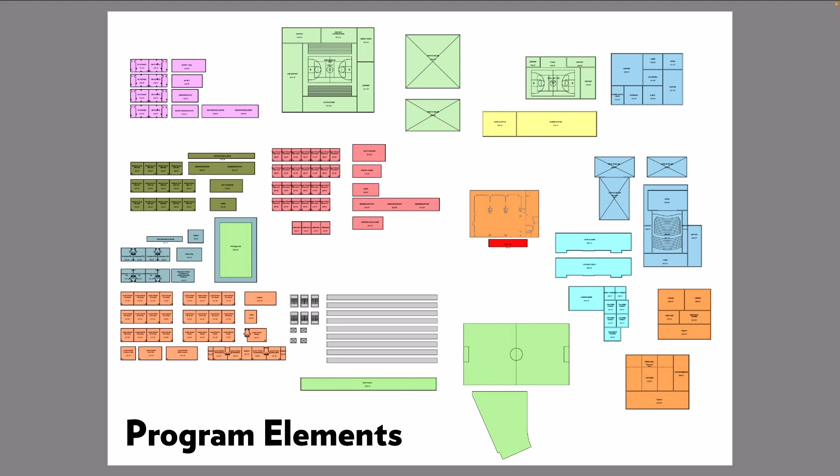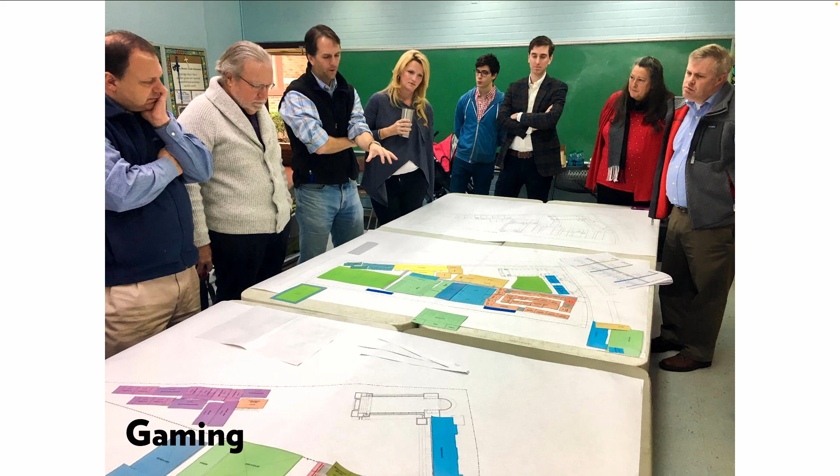Gaming is something we love doing with our clients. It engages our clients fully in the design process. Some of our clients are comfortable drawing an idea for us, but most of our clients are not trained in design and they don't feel comfortable presenting a sketch, a design to us architects. But anybody can engage in gaming.

It's a great way of getting our clients involved in creating building and space adjacencies on the campus, and they loved it. In fact, we had 2 3-hour gaming sessions with the committee, and we came up with the bones of the master plan through that process.

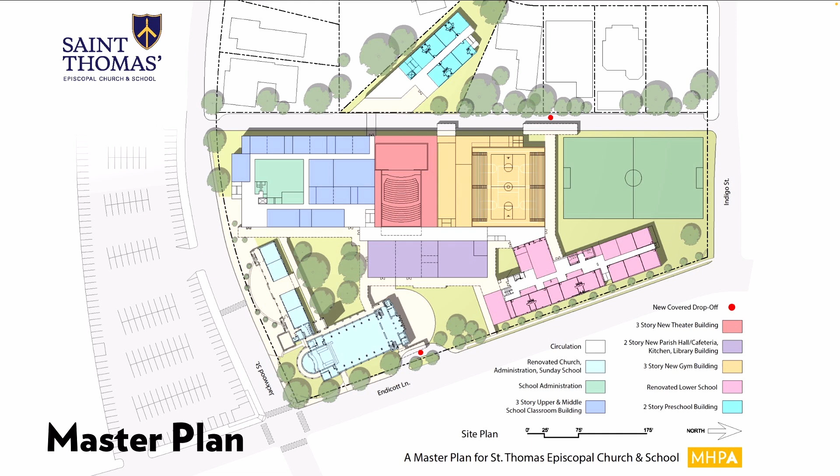We looked at options and settled on this final master plan that you see here. The building at the top, the blue, the red, and the yellow, is one 3-story structure that will be completed over multiple phases of work.

St. Thomas did not own any parking, and they were very nervous about that. The parking lot that you see to the left is owned by the landlord, is owned by Fidelis, a property owner in the area. So they're very eager to find a way, despite having only 5 acres, to add some parking onto their campus. So we devised a way to put 1 floor of parking under this big 3-story structure.

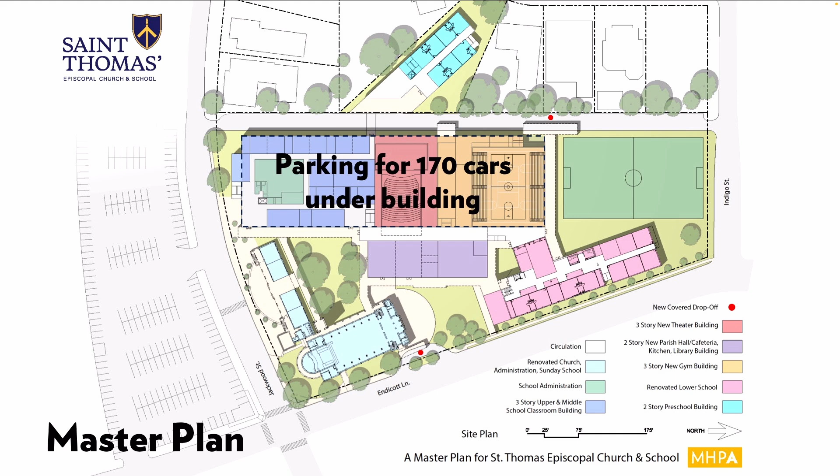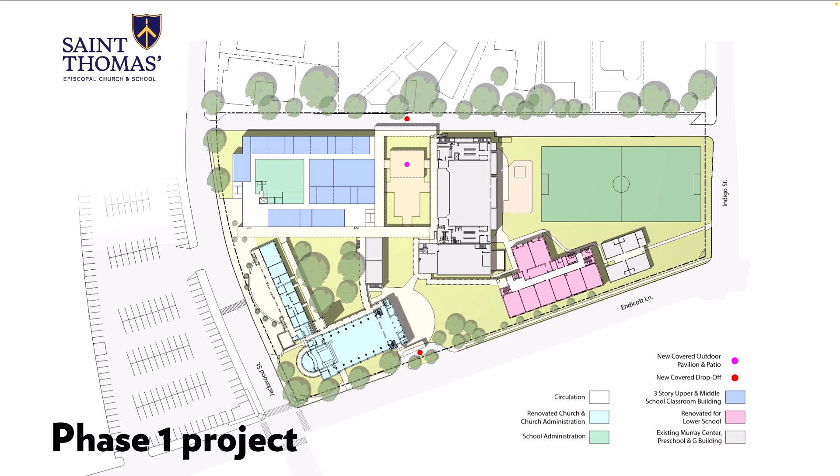Through all of our discussions with the committee, the top priorities bubbled to the top, and they became the phase 1 project in the master plan. It is the first piece of that large 3-story building that I described.

Once the plan settled down, everybody liked how the campus was flowing and functioning. We brought it into 3 dimensions. We developed the architectural character of the campus. St. Thomas looks like a little Rice University, and they love the character of their campus.

And they said, please embrace this style. And we said, yes, we love Rice University too. We love your campus. Let's work within your beautiful style of architecture. So we did that. But on the inside, they wanted things to be a little different. On the inside, they wanted things to be fresher and more modern, and that is what we did, as you will see.

We were very concerned about scale, as always, when it came to this large 3-story building. So we paid very careful attention with floor-to-floor heights, with the materiality of the design, with the detailing of the design, so that it did not overwhelm the smaller, more intimate scale of the remaining buildings.

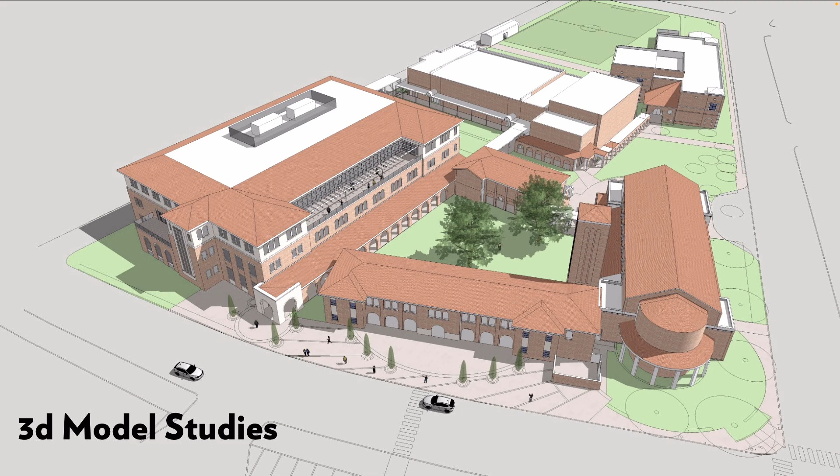Once we completed the 3D design, we worked with an artist to create beautiful artwork to support their fundraising efforts for the project. They had 6 high-quality renderings produced along with an animation.

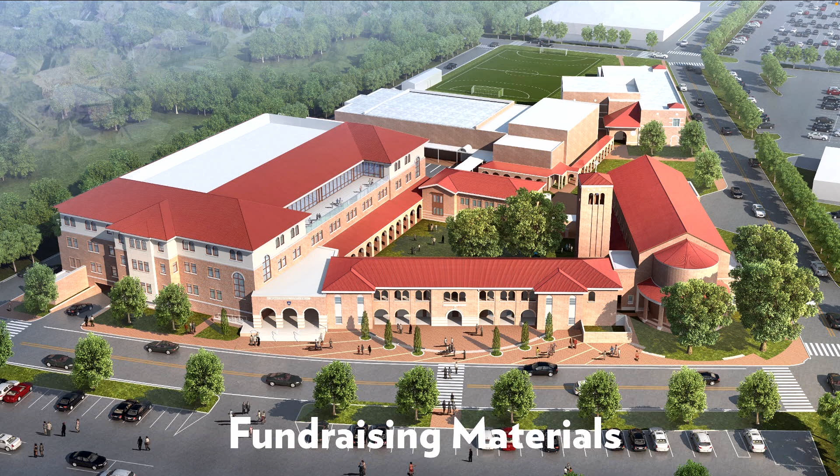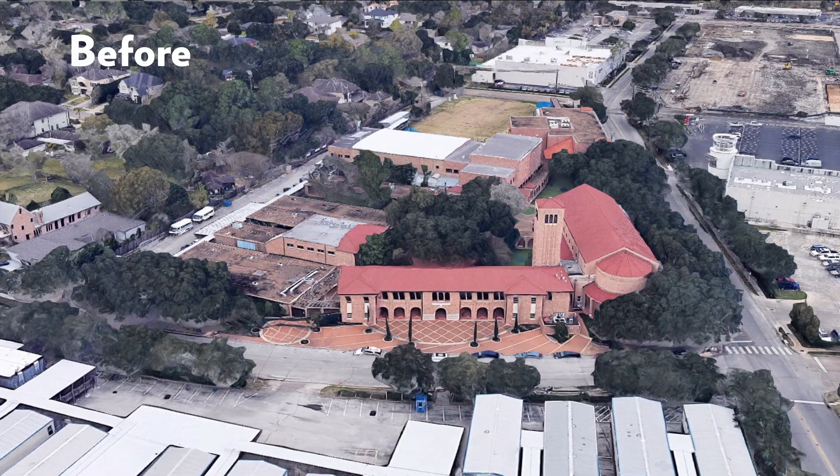I want to show you before and after. This is what the campus looked like before the storm. There are 4 one-story buildings on the left developed in the 1960s. They were past their useful life already, but after the storm they were effectively condemned. Those buildings were ripe for demolition, so we took them down and replaced them with the building you see here.

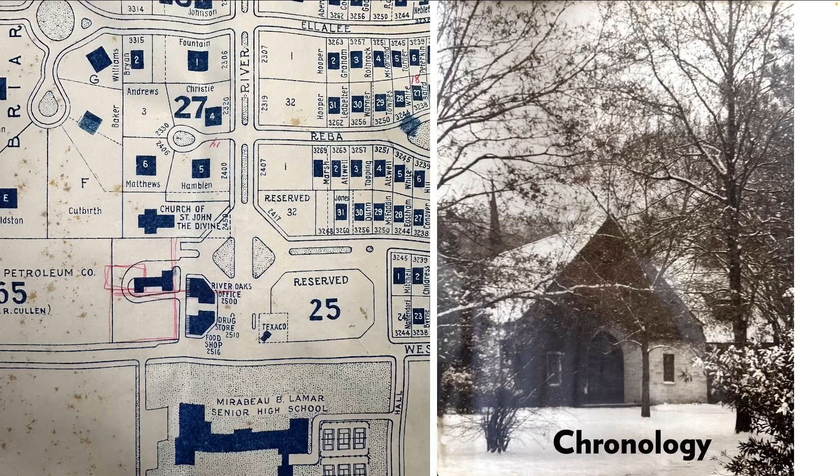This is fun. We were here for an all-day work session last week and found some old drawings, including this 1942 plat of River Oaks. This is a photograph of just a piece of it where the chapel was constructed. Hopefully you can see it there, it's the cross-shaped building in that diagram.

Back then you had only about an acre, maybe a little less, and you didn't own the land to the south where we're standing today. Back then, that's where the River Oaks office was, and there was a drugstore and a grocery store. Boy, has the neighborhood changed. And that's a pretty photograph on the right of the chapel on a rare snowy day in Houston.

Chronology: this diagram shows how the facilities have grown over time, starting with 1940 with the chapel. The church was built in 1953, Sumner's Hall in 1980, and this building was constructed in 1995. When it was constructed, the 1947 parish hall and gym structure was removed to make way for this larger structure. So as Father Lee mentioned earlier, it's been about 30 years since you've done an addition to your campus.

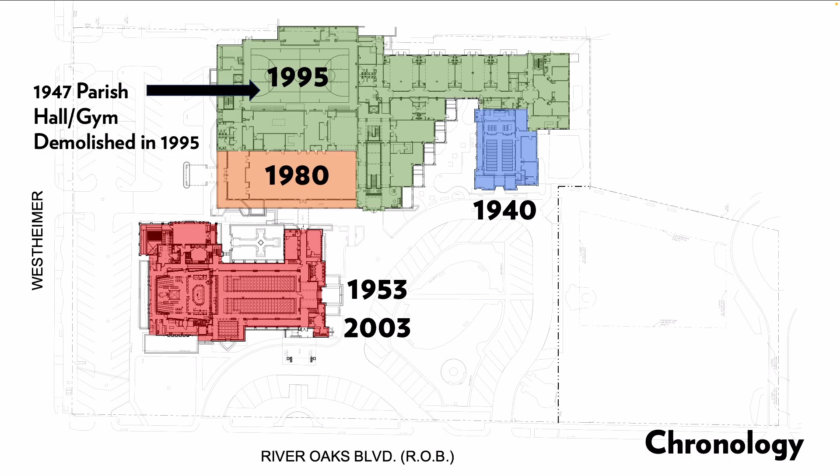This is a recent plat created last year in 2023, and it shows that your main campus, which has 4 acres, is unrestricted in use. There are no deed restrictions, no restrictions of any kind. If you wanted to, not that you ever would, you could build a skyscraper here, but you would, of course, never want to do that. However, the north lawn at the top of the screen is restricted to residential use; it's under River Oaks property owner's jurisdiction.

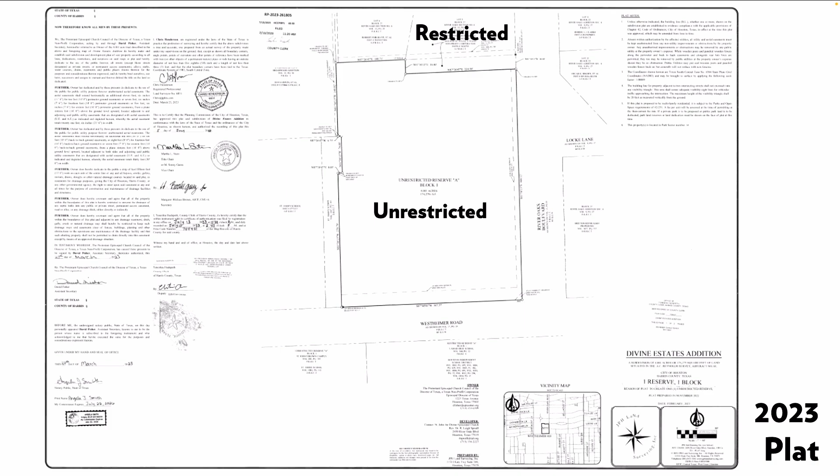Let's talk about image.

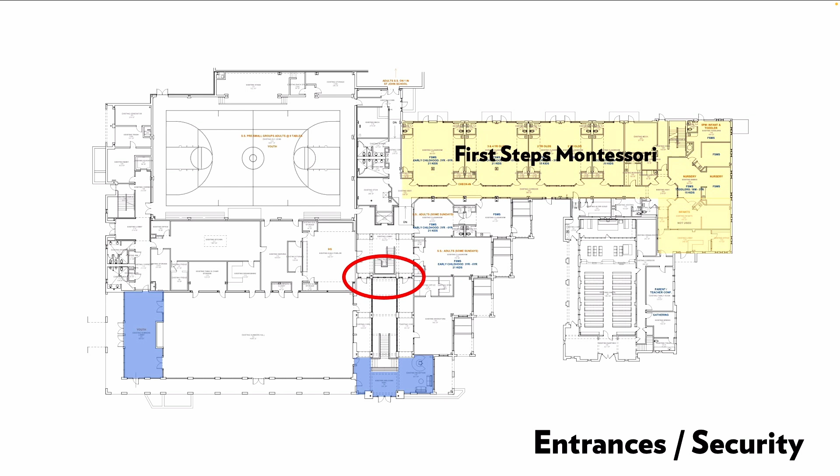Square footage. You have just a hair under 120,000 square feet of air-conditioned space. Just a little less than half of that is on this level, on the first floor of the campus. Everybody wants to be on the ground floor.

You have 31% of your space in the basement, and you have 26,000 square feet, 22% of your space on the second floor. So almost a third of your campus is down in the basement. And in all of the interviews that we have had so far, I think it's fair to say people would prefer not to be in the basement. They would like to be up on the first floor or the second floor to have windows and light and a view.

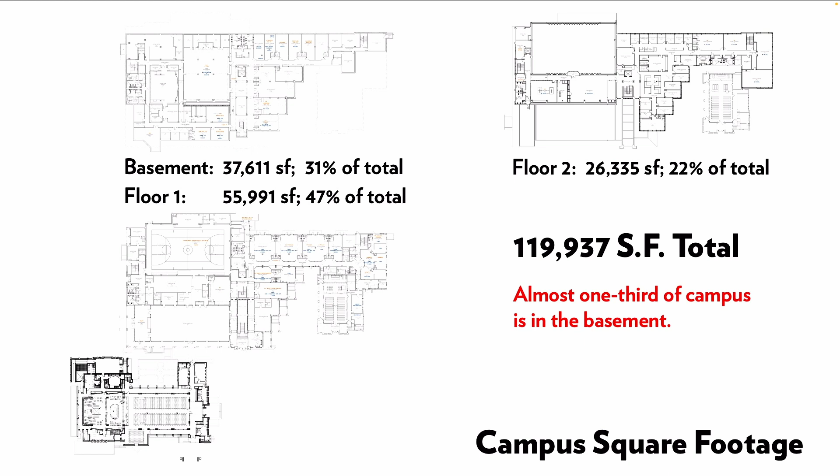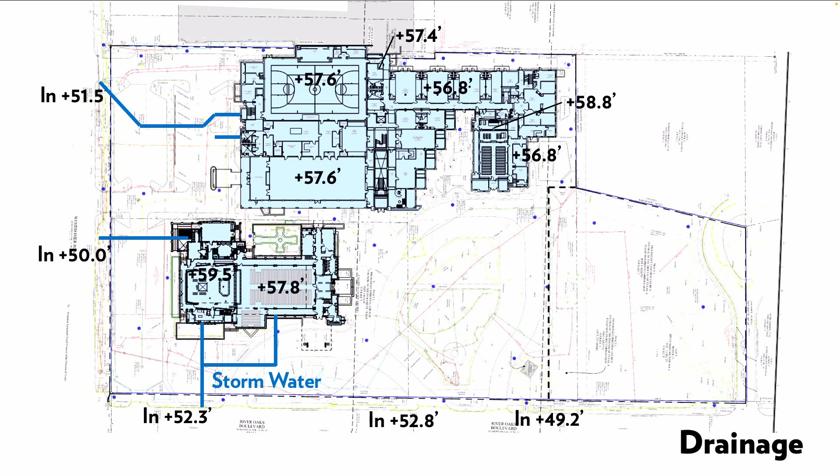Parking. Let's talk about parking.

So you have 113 spaces on your campus today. I don't know of another church your scale that has so few spaces. But you're making it work, you're making a great go of it. But with your desire to grow for the future, I think it's almost a necessity that you find a way, that we find a way together, to add more spaces to the campus.

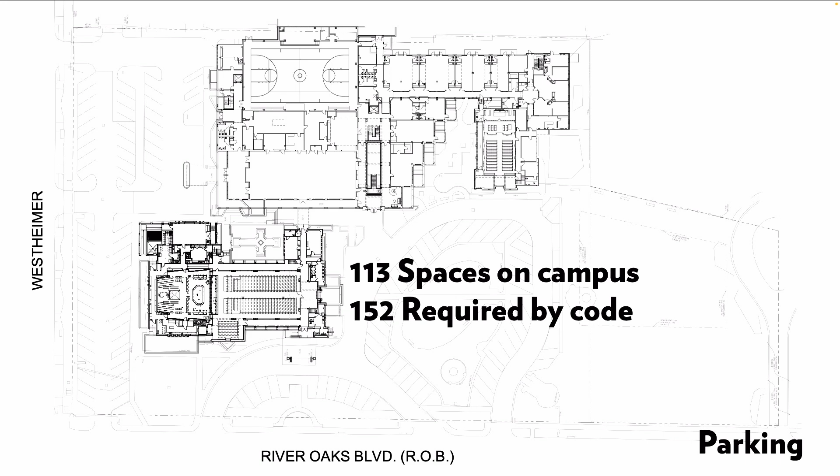I want you to know that if you were to do any project that required a permit from the city of Houston, they would say please prove to us that you have a minimum of the code required 152 spaces. The formula for that is 1 car per 5 seats in the main worship space. So you have a capacity of just over 750 in the church. You do the math, you wind up with 152. So you don't have enough. So when the permit documents are submitted to the city for permitting, it would need to include a notarized shared parking agreement that proves you have at least 152.

The practical need for parking greatly outweighs always the code-required parking. The rule of thumb we use is 2.2 people per car. You all are growing, which is awesome. So far in 2024, you have an ASA, an average Sunday attendance, of 893, not including folks online. Your big parking crunch comes in the morning from 9 to 12, and at that point in time you have to have enough parking to accommodate 658 people on average. 658 divided by 2.2 gives us 299 parking spaces needed.

You have 113 on site. That means most of you are parking off-site. And that doesn't include any growth. That's based on your current conditions.

So where do all of you park? This is where you're parking. You're parking all over the place. And on a beautiful day like today, it's actually quite pleasant, I think, to park and walk a few minutes. The rule of thumb our firm has always used is that people at most churches are willing to walk up to 4 minutes from their car to the front door of the church.

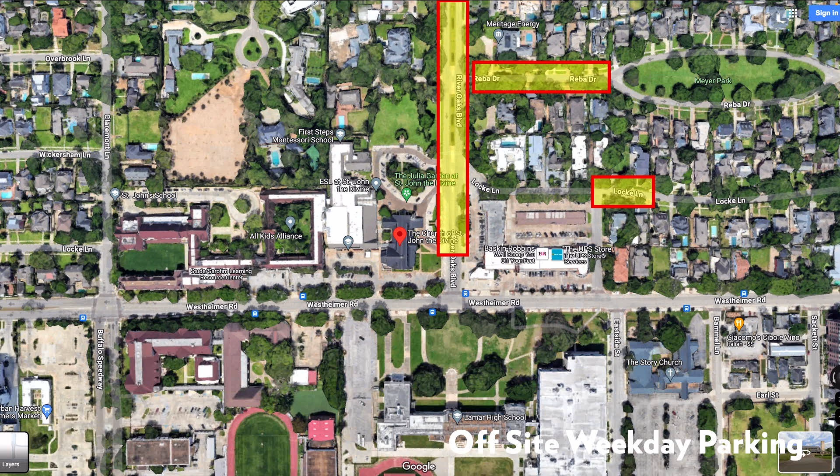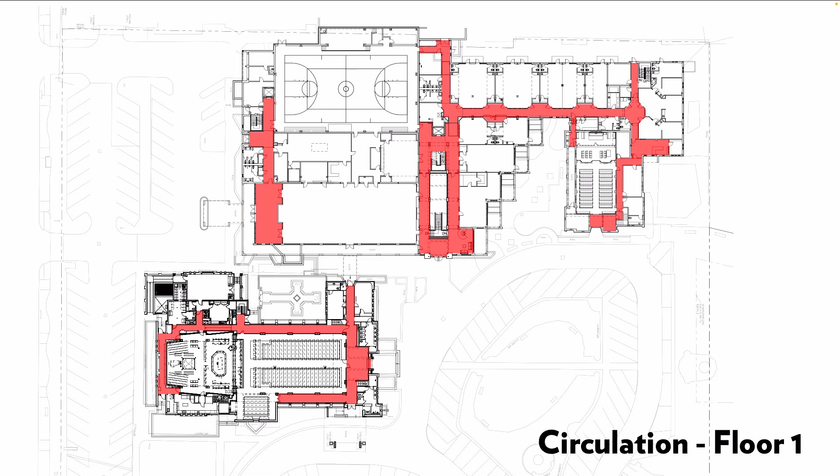This is what many of your hallways look like. They're representative of their day. Back in the day, we tended to design narrow hallways. People don't like that anymore. Today, we design much wider hallways and ceilings as high as we can make them. We also like to utilize a lot of interior glass to create good sight lines from hallways, circulation paths into classrooms. That creates a great feeling of community, we think.

We also want to understand how people move up and down in a building. And interestingly, your main stair at the bottom is split. When you walk in the front door in the Welcome Center, there's a stair in front of you that takes you to the basement level, but you can't get up to the second floor from there. You have to go past the access point to get to the stair that takes you from level 1 up to level 2. We wish there was a main stair that connected all of the floors together.

We've also heard from many of you about the elevator. We've heard it's too small and too slow, and too many of you have gotten stuck in it. And I've been stuck in an elevator, and I know that it's not fun. So we're going to give you a bigger, faster elevator, or maybe 2, who knows?

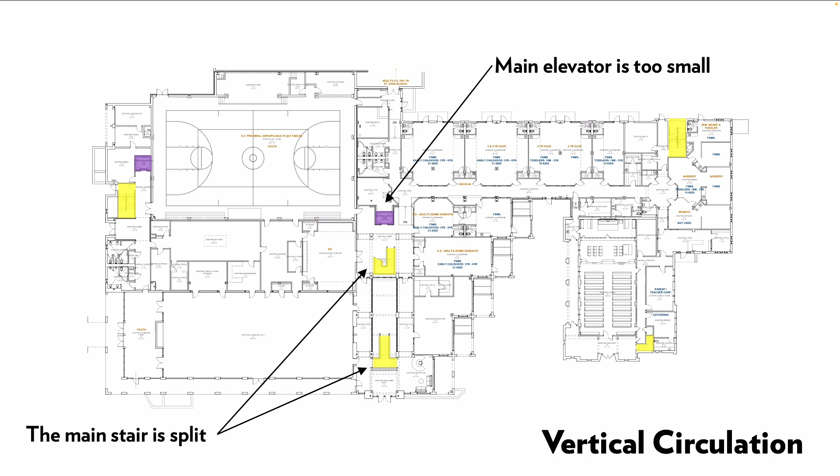And the main stair is not nearly wide enough. It is only 1 inch more than the code minimum of 3 feet 8 inches. It is hard for 2 people, one going each direction, to pass each other on your main stairs. That is inadequate with so many people on your campus. If we were to design this stair today, we would make it more than twice as wide as what it is.

The basement. So as I mentioned earlier, most of you do not love the basement. It suffers from the same things that all basements suffer from, and at the top of the list, it's no surprise, is daylight, a lack of daylight. You do have a few interesting skylights to bring some sense of connection to the outdoors, but most rooms don't have any windows of any sort, and we wish that were not the case.

We've talked a lot about this space so far, and we're wondering whether the gym continues to double as a modern worship space, or does modern worship want to have its own space, something different than the gym? So I feel confident at this juncture we're going to be considering options for each.